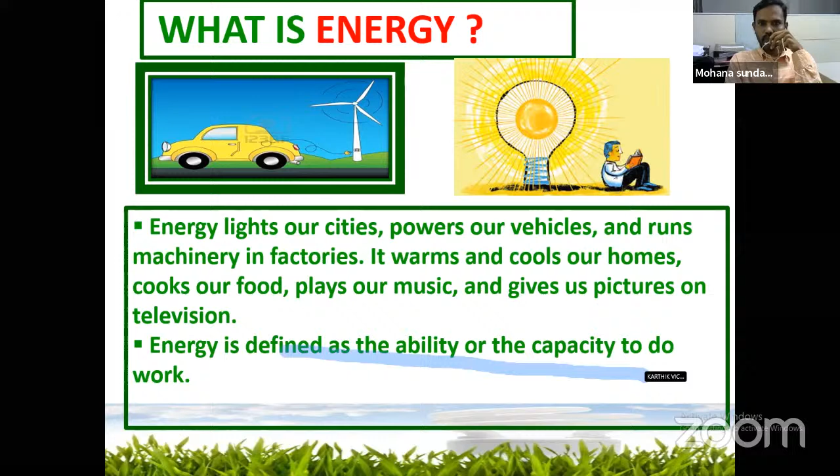It's very important in what way we are using and replacing energy, and how we are getting this energy. The place of energy is like an essential service in the modern world. We use it every day in almost all applications, starting with transportation, agriculture sectors, personal comfort, communications, and all kinds of entertainment, videos, and playing music. In almost all sectors, energy plays a vital role, and it's a very important commodity.

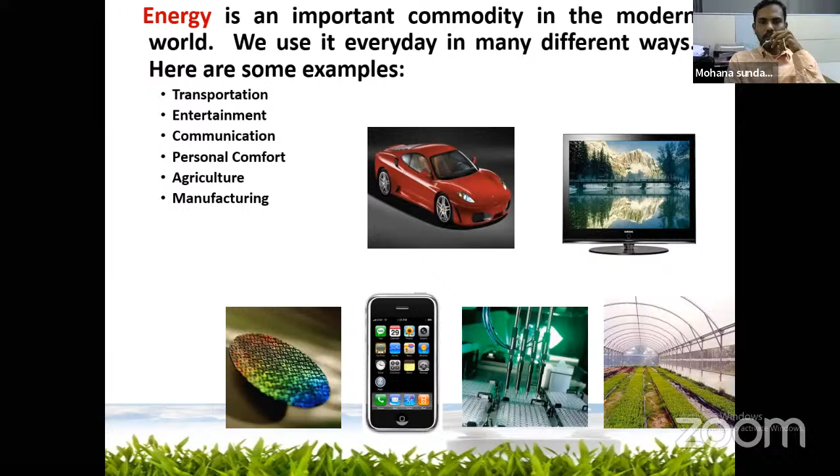So we have to take care of this energy. How we are generating this energy, and how we have to do conservation of this energy - these two parts are very important. These are the two verticals: getting the energy in different forms, which we'll discuss, and then how we are going to utilize this energy - how can we go for optimization, how will the conservation of this energy happen, so that it can be used for our better things.

As we know, energy can be classified into two types: renewable energy and non-renewable energy. As the past has shown, the use of coal and fossil fuels means we have to shift towards the paradigm of renewable energy, with usage of renewable energy systems and sources such as solar and wind, or maybe small kinds from biomass also. This kind of energy plays a vital role as per our UN Sustainable Development Goals - Goal number 7 is specifically for utilization of renewable energy. Renewable energy is available plenty, but how we are going to utilize it is a very important factor to consider instead of going for non-renewable energy sources.

As we know, we have thermal power stations burning all kinds of coal, and this may be critical to human life in almost all of eastern Europe, as well as in southern parts of China and in India. We are moving towards conversion of non-renewable energy to renewable energy, as we know it is hazardous to go for non-renewable energy sources, in the way we are extracting power.

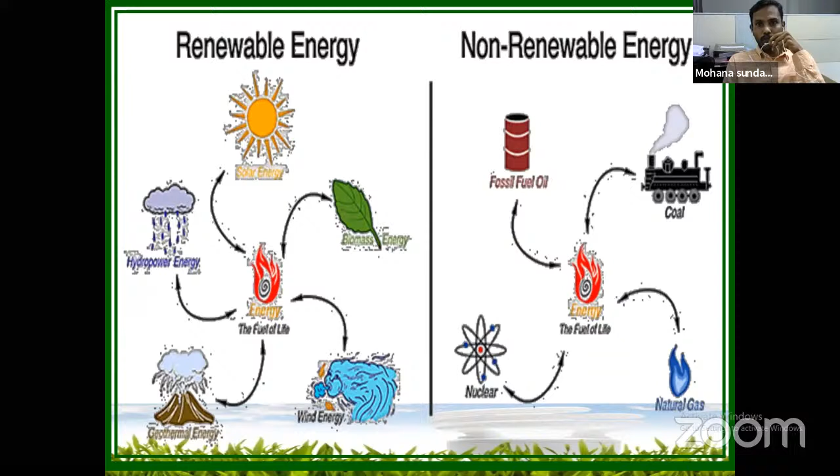So what are the alternate energy sources? We have different forms of these energies, like wind energy, solar energy, hydro energy, tidal energy, nuclear energy, and geothermal energy. Nowadays we are getting newer forms of energy too, like friction energy, and small thermal electrical energy from how waste can be converted. So in all kinds of forms we can get energy sources, how this waste heat can be used for conversion of energy.

Alternative energy sources nowadays play a very important factor in how they contribute to the world, utilizing almost all energy sources from wind, hydroelectric, solar, tidal, and a small part from geothermal. These are the alternative energy sources, along with biomass energy.

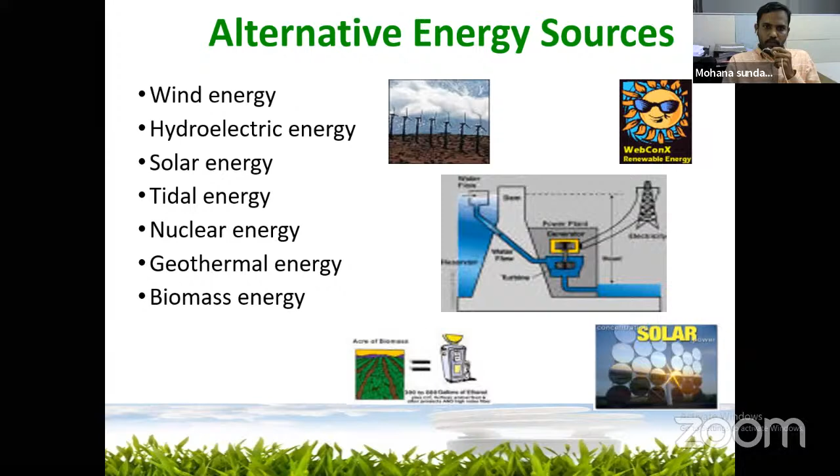As we speak about these energies, we have non-renewable and alternative sources. We have to go for alternative energy—meaning existing fossil fuel will not be considered an alternative. We have to move towards renewable energy, and how we implement this renewable energy is a very important factor.

In almost all applications, solar and wind play a vital role in the usage of renewables, particularly solar. The unit cost of this tariff has been getting reduced in the case of solar compared to three years back, which paves the way for the importance of utilizing renewable energy, particularly solar.

Solar energy comes naturally, so how we harness this renewable energy is very important. We may boost the voltages or power in such a way—being electrical engineers, we should go with different kinds of modeling of inverters and converters.

We can get more power that can be utilized for all kinds of applications. Our solar system might achieve only 30 to 40% efficiency, so as engineers, how we utilize it to get back to 100% efficiency is a very important factor to consider.

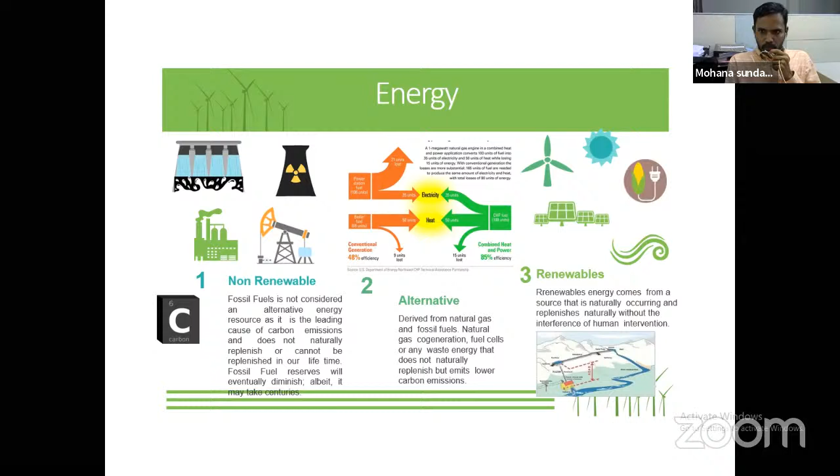That's why we are paving the way for conversion of non-renewable to renewable energy.

As we know, we have to conserve this energy. So conservation of energy—we are producing energy. The next thing that comes to mind is, yes.

Saving energy is a very important priority. That's why we are celebrating this entire week—how to save this energy. If we save this energy, we save it for the individual as well, and it contributes to the country. That's why demand keeps increasing, as the population keeps increasing.

It's important that someday non-renewable resources will be completely exhausted, and we have to particularly move to alternate energy like solar or wind energy. So how we utilize these renewable resources, and how we optimize our dependence on them, like solar or wind energy, is a very important factor.

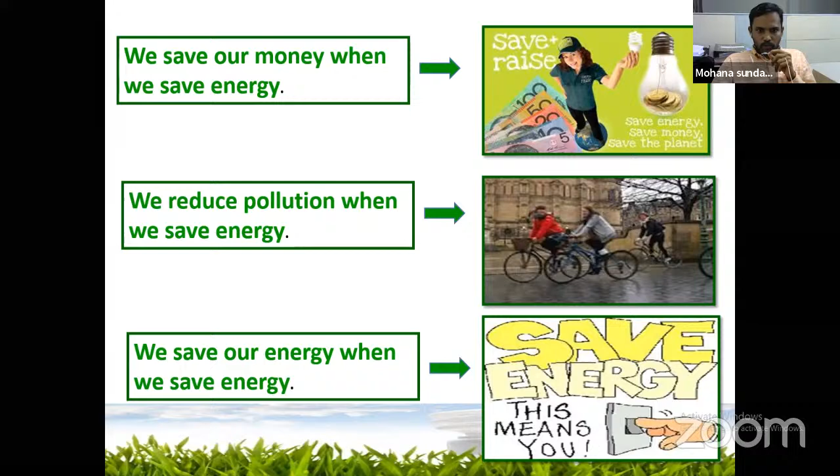Being human beings, we have to live for many years and give to the next generation. We need to reduce pollution for the next generation—that is very important, so a sustainable lifestyle is very, very important. We save energy—that's the principle behind it.

The utilization and replacement with energy-efficient devices is very important. Star rating plays a vital role in home appliances, so we should go for high star rating devices. That is a very important factor to consider as an engineer.

At home we know that we cannot keep lights unnecessary, so that's the thing we can do to reduce energy. Based on that, we'll have small kinds of energy conservation we can implement, and then we can utilize water heating efficiency. We can go for different kinds of IoT devices.

Now they keep on incorporating everything. We can reduce the speed of that particular fan, or we can go for different kinds of energy efficient fans, like the BLDC fan, super fans, energy conservation fans. Also in public places, we can switch off the fans and lights in bus terminals, or switch off the street lights whenever required.

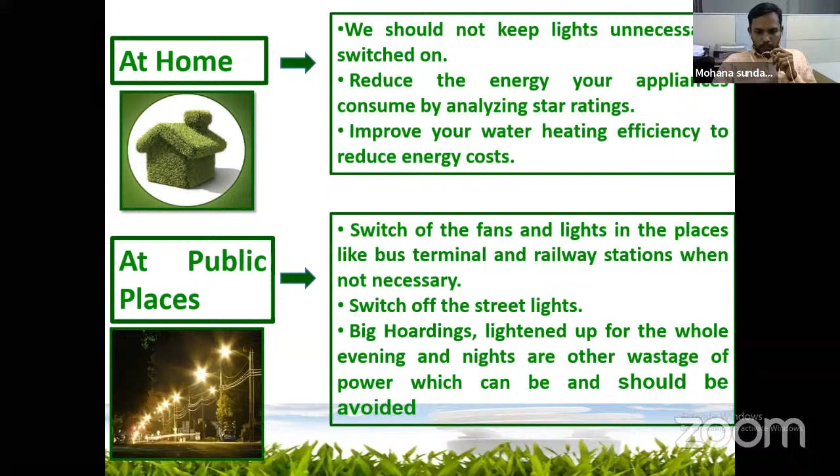So this kind of innovation and technology we can bring back, as we have so much of an audience who may be technically sound. We can think about how we can optimize these kinds of things so that we can save energy in our public places. That plays a vital role.

So for energy conservation, as our chairman and past chairman pointed out, 70% of India's energy comes from fossil fuels, with coal accounting for 40%. So in a country like India, by the year 2030, the depletion of these fossil fuels will be happening.

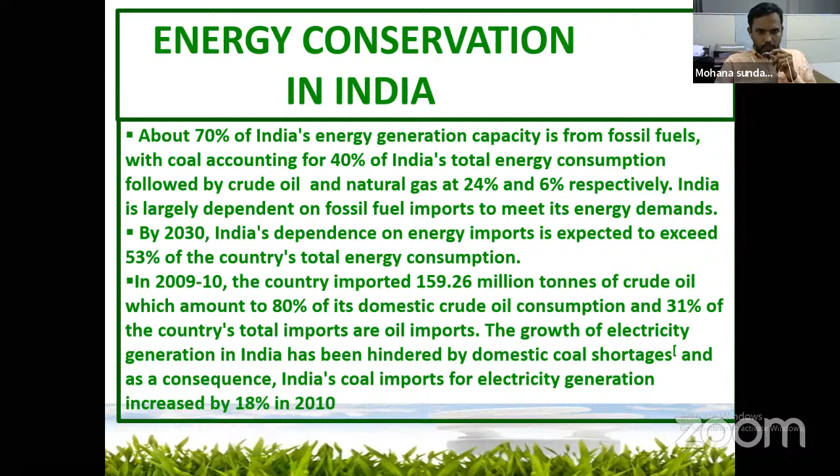Then we have to come back to different kinds of energy sources, like renewable energy. So these may be some basic statistics on why we are using energy conservation in India. As we pointed out, what is the basic difference between conventional and renewable energy sources?

So here the hot topic is energy management with respect to the renewable power system, and how we are effectively using it when connected to the grid-tied power system. We know that on the conventional energy sources side, we have fossil fuels and nuclear fuels, which create atmospheric pollution.

It's not clean energy, compared with renewable energy sources. Renewable energy sources provide a clean energy system with zero pollution.

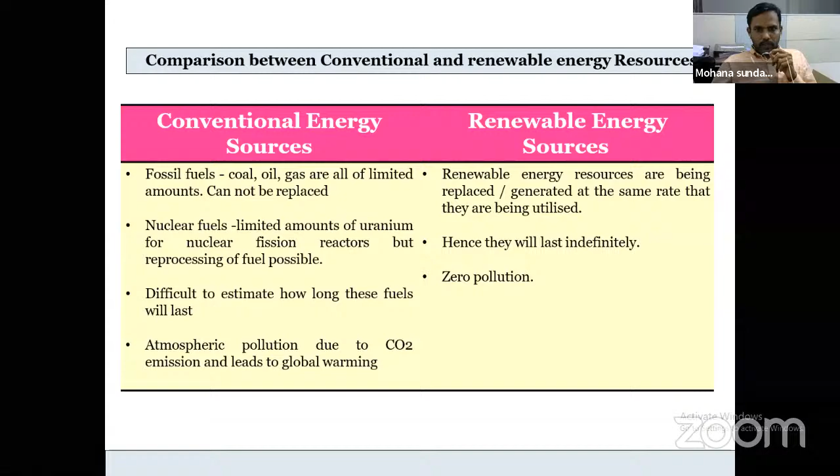As we know, the end of coal is coming 3 times faster than expected. What is the report in the 2022 Integrated System Plan on energy policies? In Australia, they are planning to shut down all kinds of coal generating power plants. As new policies come, even some industries and governments will be surprised.

So that's why we can work towards reaching the UN Sustainable Development Goals, and pave the way for other generations. The end of coal is increasing very fast, so we can expect that almost all will go with renewable energy sources.

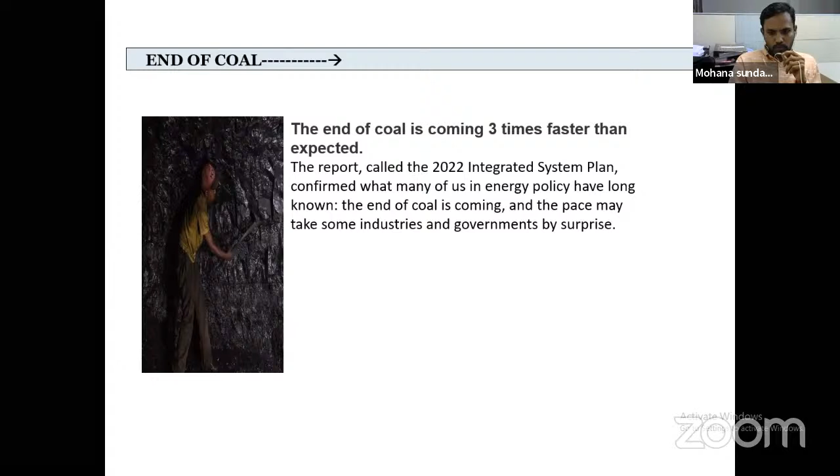We are standing in the fifth position in renewable energy scenario, with respect to the entire world. In fourth position as well, starting with respect to 2018 and 2019.

We are almost nearing this target, with 156 gigawatts reached. Almost 6 gigawatts from nuclear, and almost 150 gigawatts from renewable energy sources, as we are planning for 100 gigawatts from solar, 60 gigawatts from wind, 10 gigawatts from biopower, and 5 gigawatts from small hydropower plants.

We are also doing small conversions of rivers, converting those into useful utilization of energy - that's the 5 gigawatts from small hydropower plants. This is the target; we are on par, reaching this target of maybe 100 gigawatts.

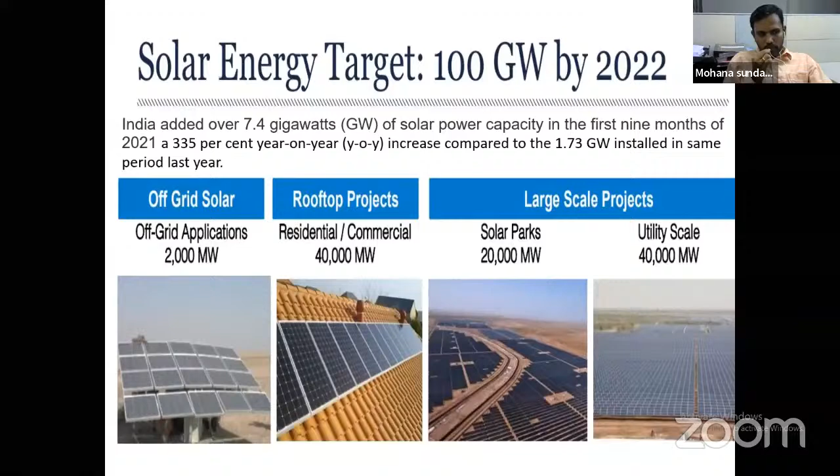Recently we could see this kind of erection of solar power plants also in our CRD. Already they are planning to erect all kinds of small projects. So these are some of the ways we are replacing our solar panels, different ways, with innovation technologies.

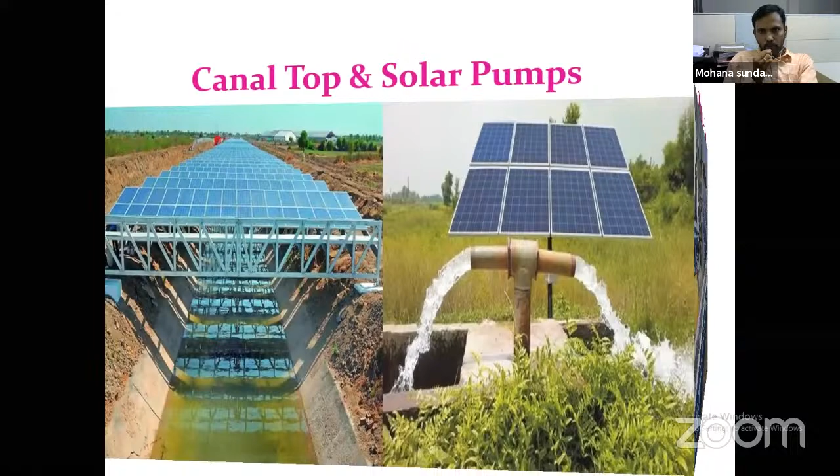How you can replace it, maybe like floating solar plants, or over the canal, and then for agricultural purposes, how we can use solar energy. That is very important, so maybe we can use it for railways. As we know, modernization of both advanced and developing countries' energy needs is a very important factor, so the way we are taking this energy is very important.

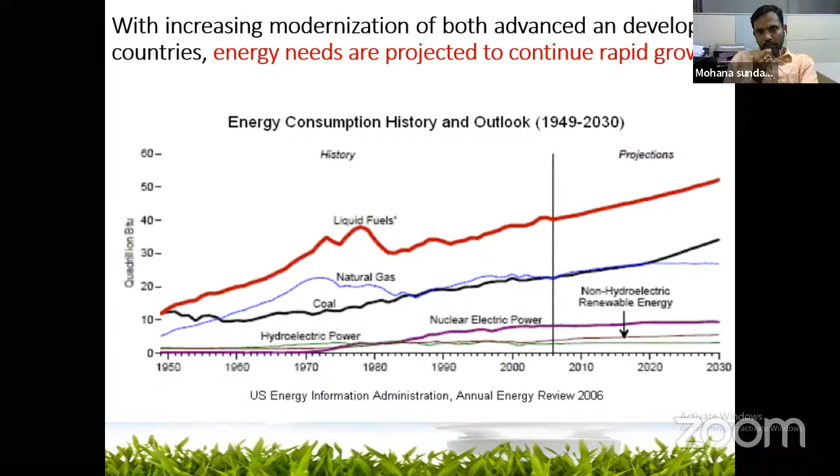This slide shows our projection towards 2030. There is rapid growth, a tremendous increase in replacement by renewable energy, almost 40% of whatever we are having right now. We are replacing fuel from renewable energy sources.

As we know, today's technology components, like engineers, we have good kinds of engineers who can develop new energy systems. You can see a new small startup company, how they are generating energy from friction. Everything, they are able to do it.

I will show you a video of how the technology is booming, how they are taking energy from small kinds of innovations they are doing. That's very important, since we will have so much audience watching this, to see how various innovative methods can be utilized.

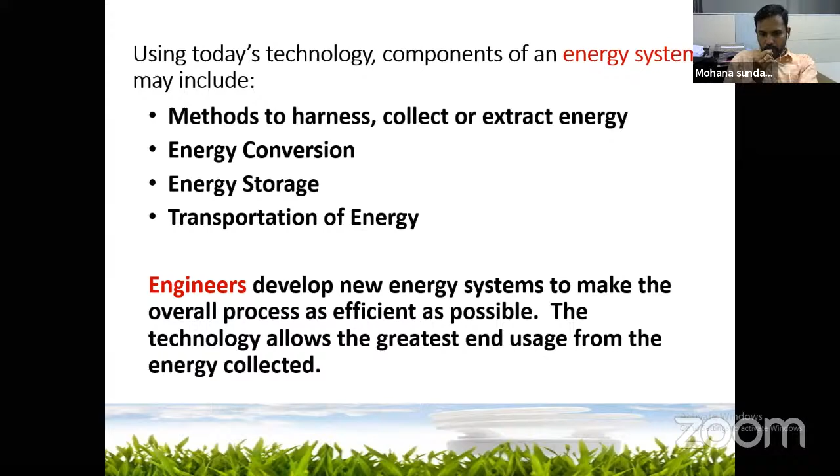In the sense of how there can be energy storage, how there can be conversion, how this can be transported, these things are very innovative. It plays a vital role with respect to engineers developing new systems.

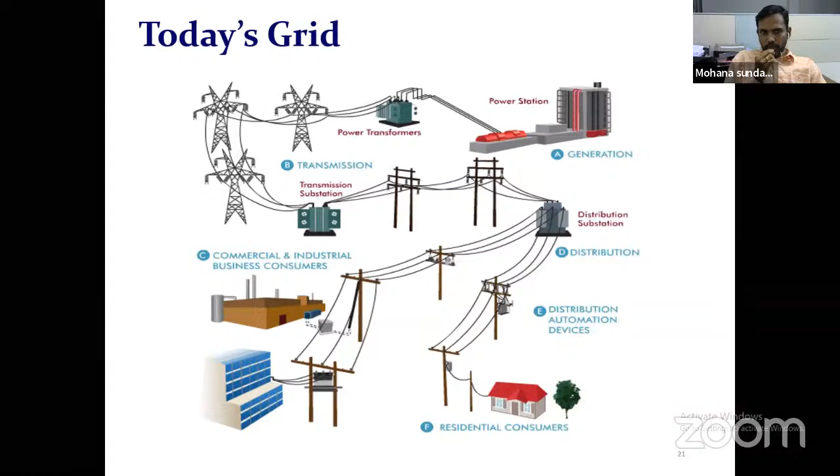This may be like our today's grid, with all this combination of wire systems. Everything will have the traditional power generation system, maybe the grid, how they are. This may be the common things like generation, transmission, as well as distribution.

We can replace all kinds of systems with renewable systems. When you're integrating this, maybe tying up with the central power system, then we'll be facing so much of the problem of imbalance in everything. So being a technical engineer, how should we handle these kinds of imbalances? That is a very important factor to be considered.

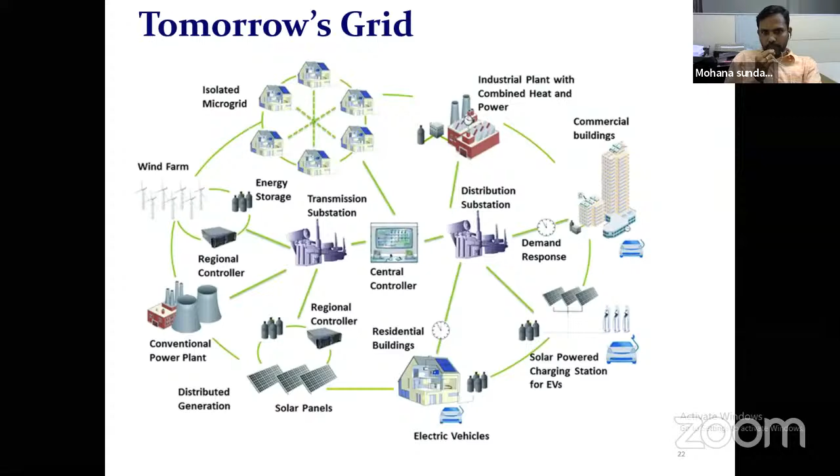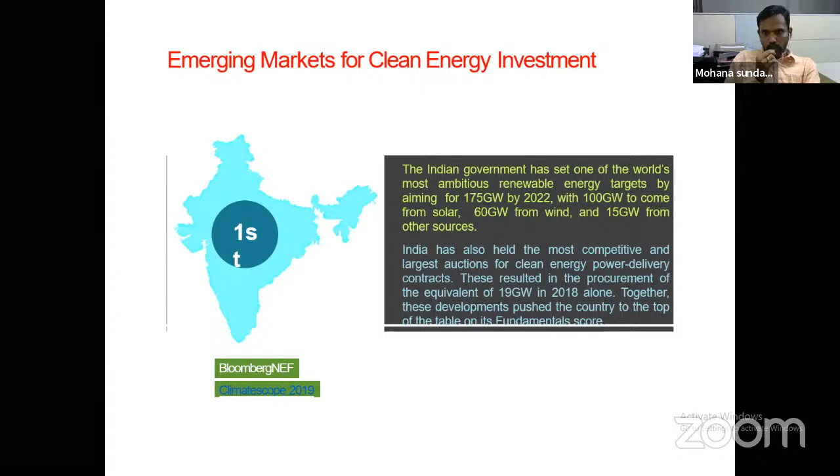So this is like emerging markets. As already mentioned, we can see that we are reaching almost 175 gigawatts, maybe in a couple of years, in 2022, we will achieve this goal with major contribution from renewable energy sources.

As people are moving towards application of this, particularly solar energy, there will be a huge job vacancy, a huge need for jobs, particularly in the world. We could see that almost 24 million jobs will be needed by 2030, as we are promised to the UN Sustainable Development Goals.

We can utilize this, and there will be a tremendous increase in application of renewable energy, particularly solar energy and wind power. So this space has huge opportunities for engineers.

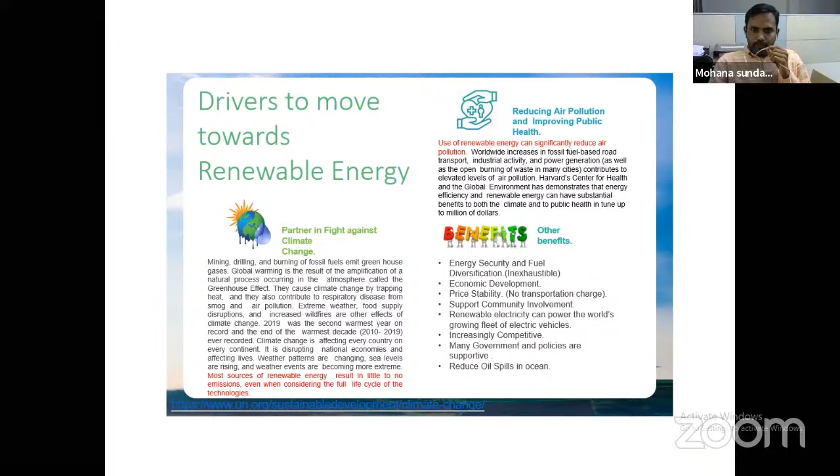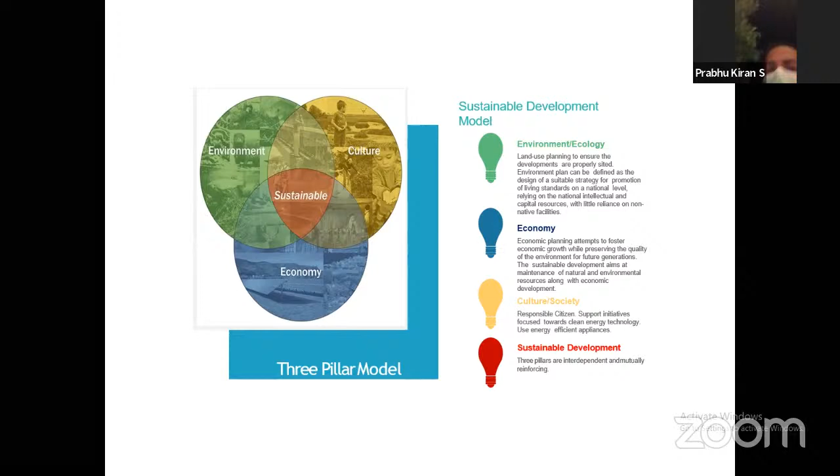For sustainable development, we use the three-pillar model: environmental, cultural, and economic, with techno-economic analysis and how it can be placed for the society. This is a very important factor to be considered.

Solar is already becoming cheaper than new and existing coal. The cost of utilizing solar power, the per-unit cost, will keep getting reduced, and we expect further reduction. So automatically people will keep moving to standalone or grid-connected systems. This paves the way for how people are moving towards renewable energy, particularly solar and wind.

When talking about this model, all kinds of modeling factors are very important to consider. This includes PV modeling, how to effectively utilize power from solar energy, and how that power is taken and placed back to the grid.

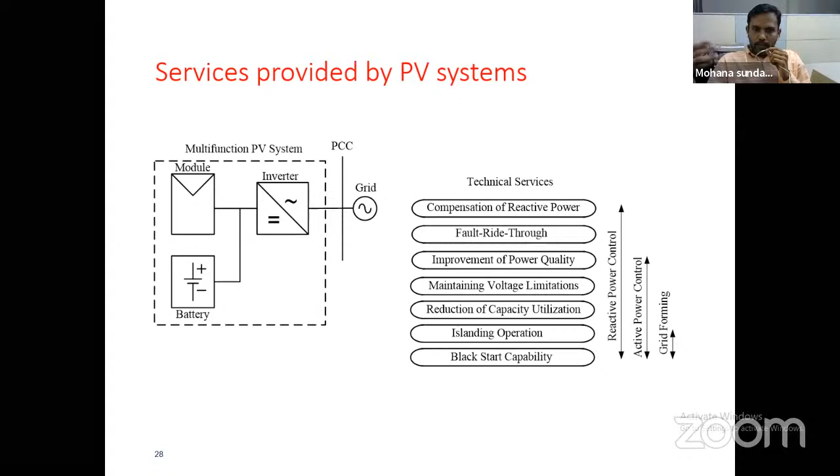We completed small case studies along with my research scholars, where we worked on how to maximize the efficiency of the PV grid systems.

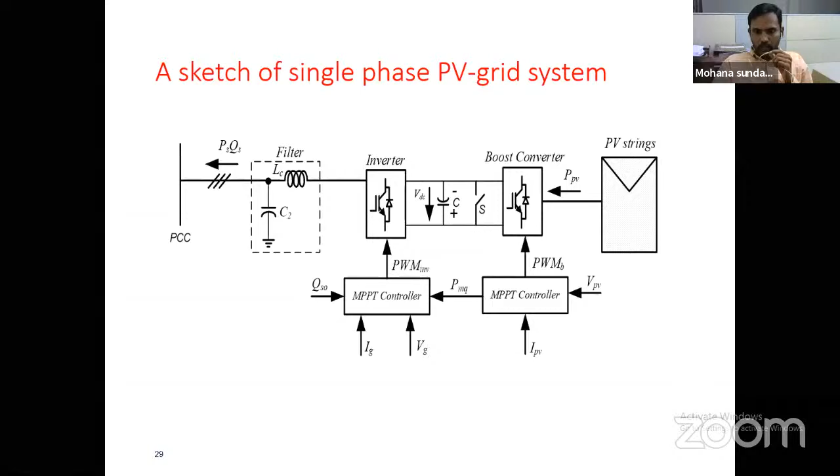We use new innovative ANN-based techniques to optimize things so that the controller gain keeps increasing, allowing it to provide a continuous power supply. That is the main factor to be considered.

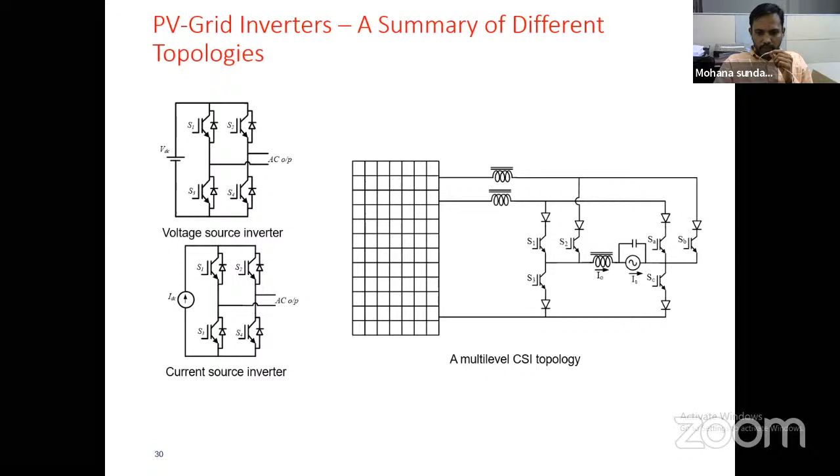These are some different topologies for PV grid inverters, like voltage source inverters and current source inverters, and how we handle multi-level CSI. We'll see later how these can be connected in different forms.

As a basic fundamental, this is the classification of multi-level inverters: single DC source and separate DC source, with diode clamp and capacitor belonging under single DC source.

We'll see later, in different case studies, how we implemented this, what the objectives were, and what we achieved.

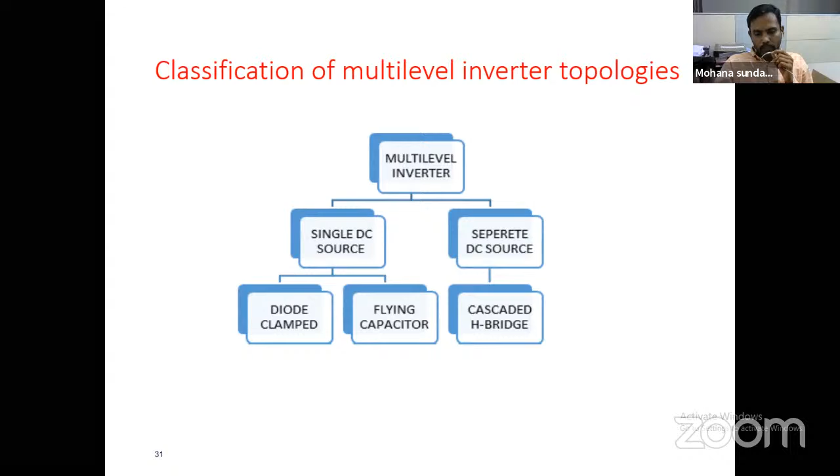The traditional two-level inverter versus multi-level inverters: before going into multi-level inverters, there should be a comparison. As a researcher or in any startup implementing a multi-level inverter, the first question is why we need a multi-level inverter, why it runs on two levels, and why we have to change to multi-level. What are the prerequisites or constraints, and what is the advantage?

Looking at various factors we will consider, the switching loss is high in two-level inverters compared to multi-level inverters, where it will be low. The dV by dt is also high in the case of two-level inverters. These are the parameters.

On the left hand side we have more voltage stress. So when going for this kind of multi-level inverter, the stress will be less, the frequency also very less, and the level of output voltage is very high, as it's a multi-level inverter. The third important factor is the harmonics, which we have to reduce. That's also better when compared to a two-level inverter. So this is the basic thing.

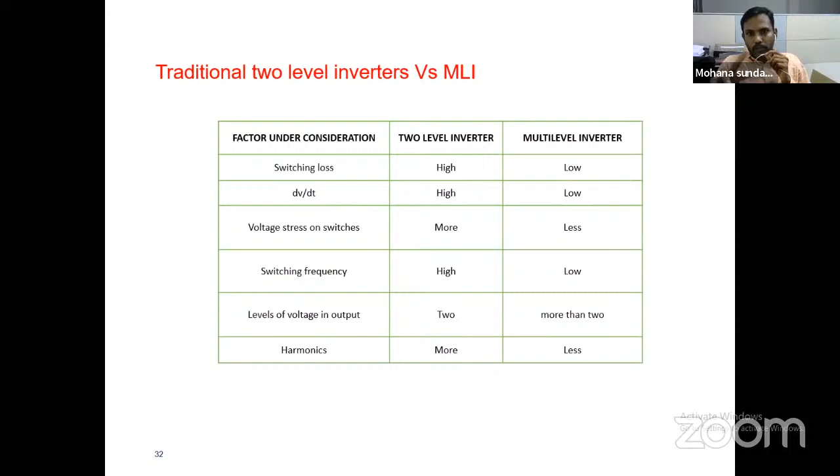When going for multi-level inverters, as pointed out, there are different network structures: diode clamp, flying capacitors, and cascade multi-level. So what is the advantage, or disadvantage? These things play a vital role with respect to efficiency. We can get high efficiency, but there are certain disadvantages also.

The real power flow control for the inverter is very difficult. These kinds of things play a vital role. Being an engineer, we should know why we go for different kinds of inverter topology, particularly with respect to this MLI. So this will be your cascade multi-level.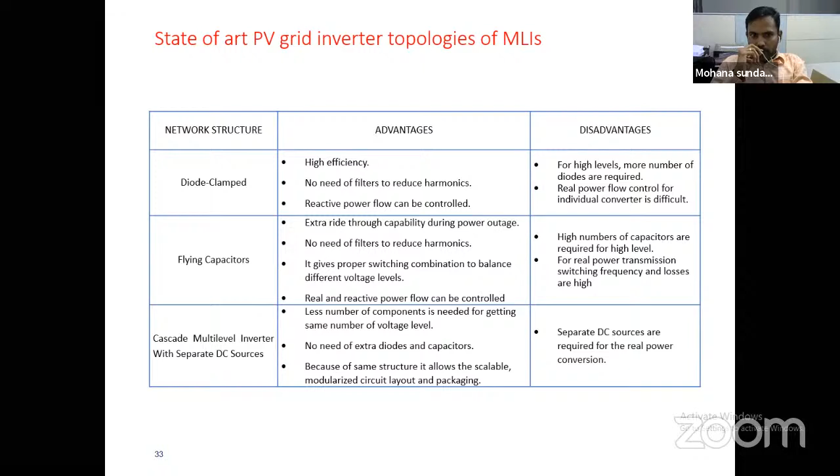So after the basics, why should we go for this Z source inverter, particularly in applications in solar? We know that Z is a combination of inductors and capacitors.

It can be operated as a voltage source inverter or as a current source inverter (CSI), depending upon the application and the load. The output voltage varies from 0 to infinity. These solar modules are widely preferred for residential as well as commercial use.

So the main concept behind this is nothing but we have to develop an economical and efficient PV system. That is very important.

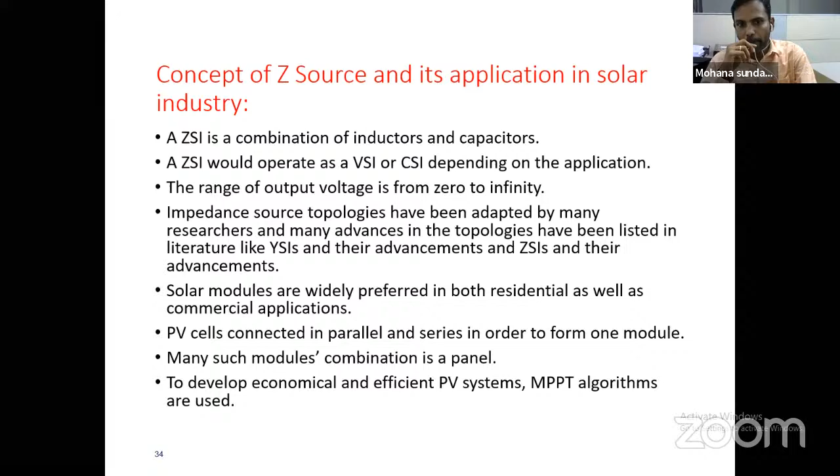As pointed out, this PV inverter structure, the inverter portion plays a vital role, like the boost circuit, in order to convert DC to AC. Z source is an intelligent choice. People are doing all kinds of research on how we can utilize this Z source inverter, particularly because it can boost the voltage level with a very compact structure.

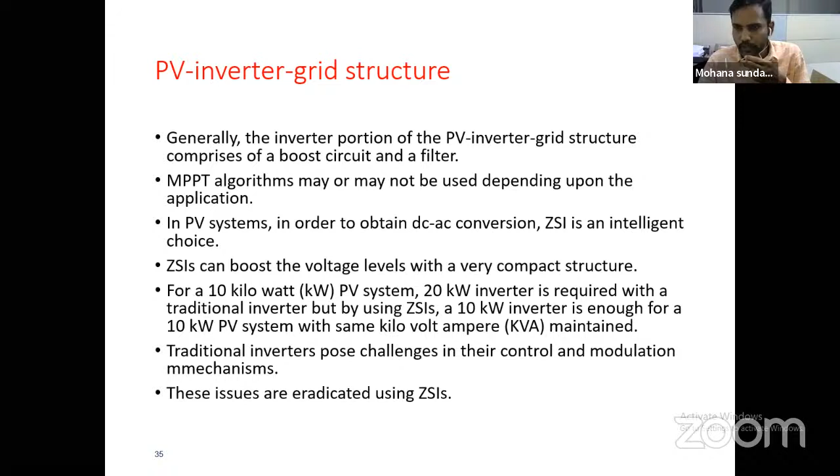That is the main advantage compared to ordinary inverters. For example, for a 10 kilowatt PV system, a 20 kilowatt inverter is required with traditional inverters. Whereas when using ZSI, a 10 kilowatt inverter can work with a 10 kilowatt PV system. So the same kilo volt ampere rating is maintained, and we should not go for an extra 20 kilowatt inverter. Traditional inverters pose some challenges in their control or modulation mechanisms, and these can be eliminated by using Z source inverters.

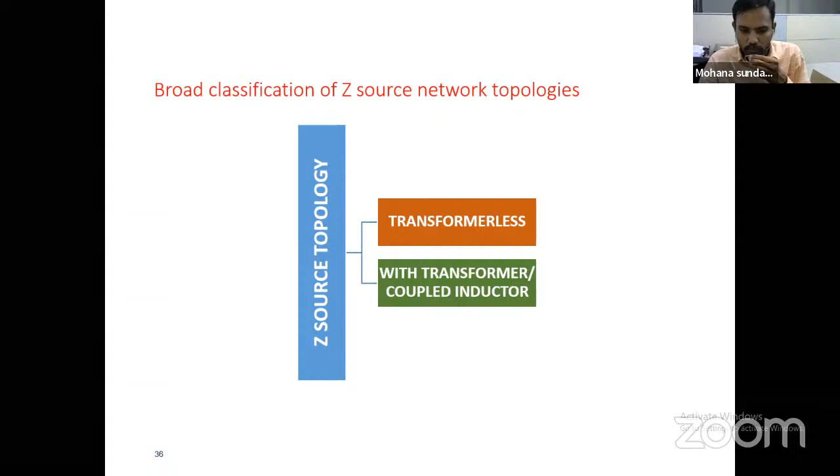The topology will have different kinds, transformerless and transformer-coupled inverters, so it's these two things. Again, why we are going for Z source - even within Z source we will have different configurations, different topologies.

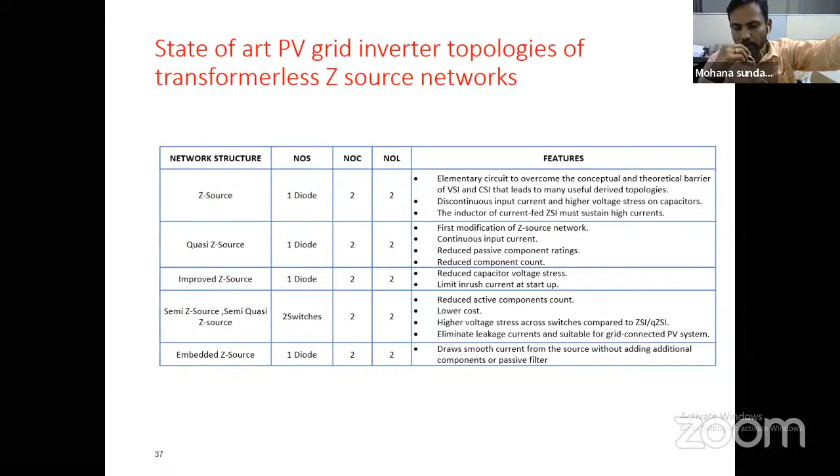So this will be a continuation, different kinds of network structures again. We'll have different combinations of this, different applications, different features.

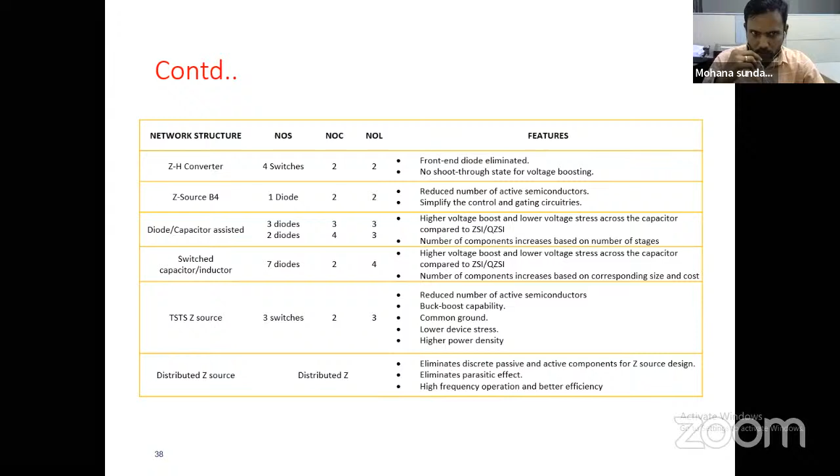We can reduce the number of active semiconductors. We can improve the buck boost capability also, and the high power density also depends upon the application, going for different applications, maybe like electric vehicle applications also.

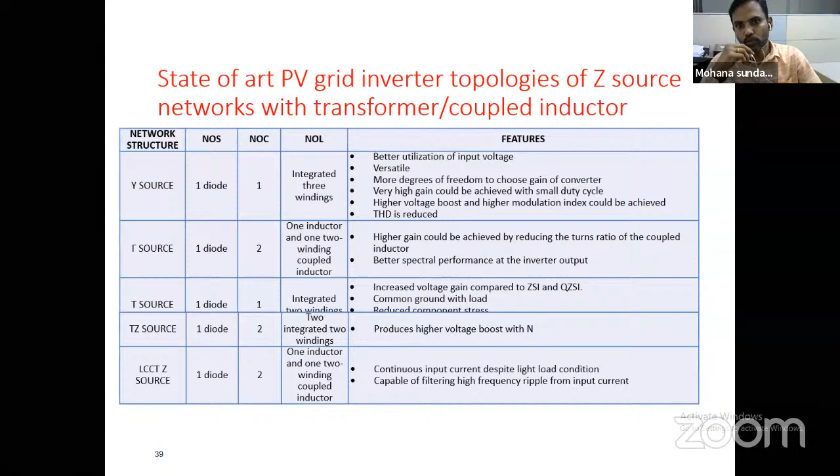So this slide shows different combinations. Why am I showing these slides? Being a technical engineer, you should know why, what is the importance, why we need a Z source compared to different kinds of sources, and how it can be utilized properly, how we can boost the gain, higher gain, based on your duty ratio. That is very important, so this is in continuity of this thing.

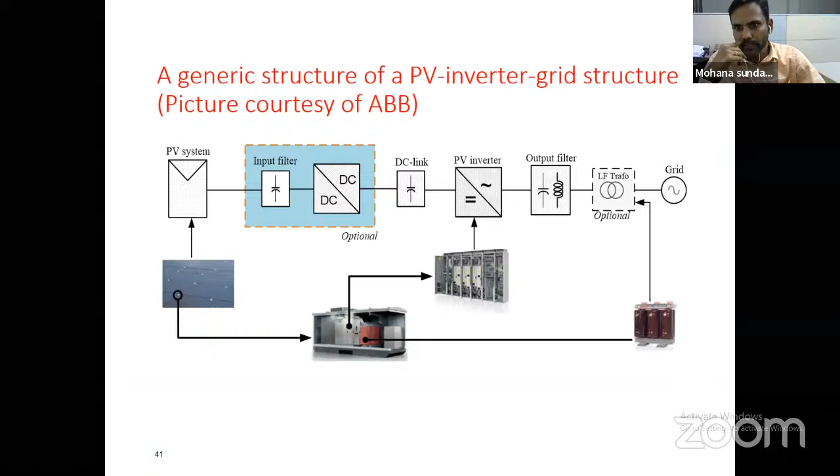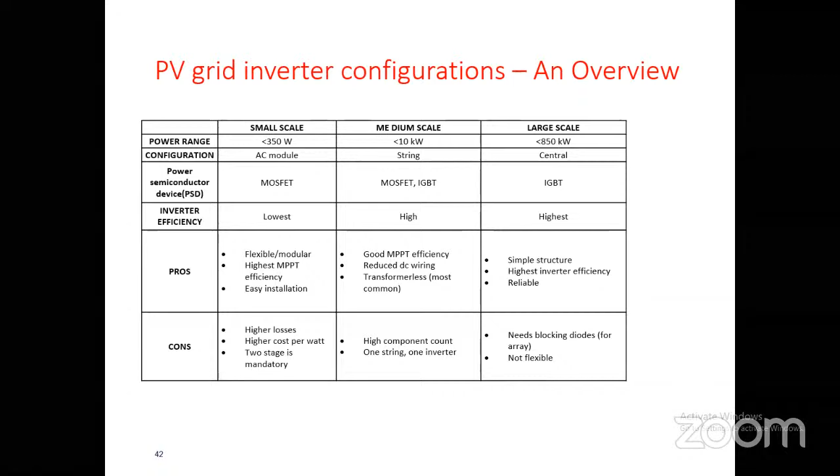This picture, courtesy of ABB, shows the entire system, how we are replacing it for different applications like grid applications, taking the power from renewable energy sources, how we are connecting to the grid. This may be for small scale applications, maybe less than 350 watts, or medium scale less than 10 kilowatts. For this center, we'll have different configurations like MOSFET and MOSFET-IGBT and then IGBT, with all the pros and cons, like how we are achieving flexible mode or grid efficiency. That is very important when coming to different applications.

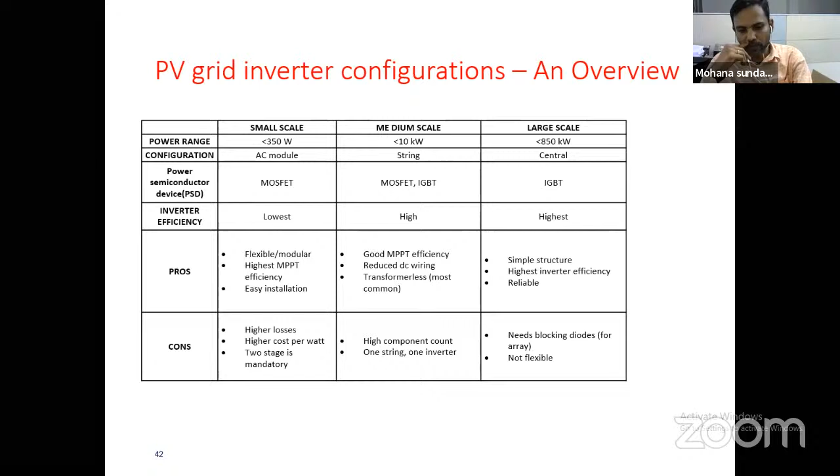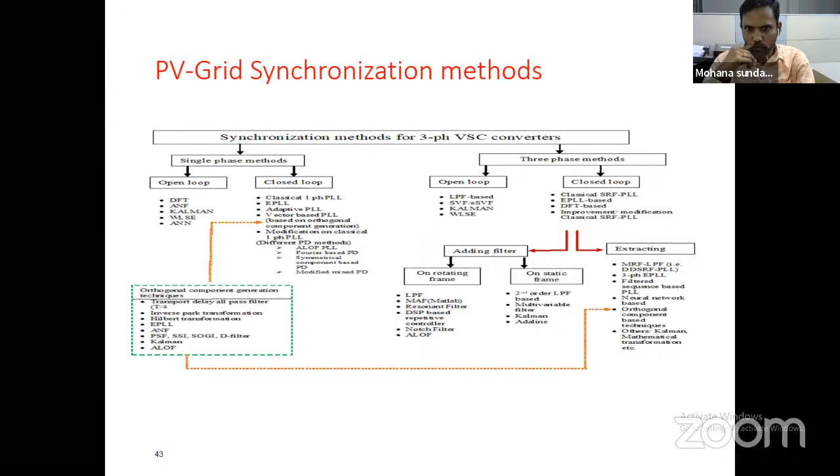So why we are having this configuration, we have done a kind of survey, and we can come up with solutions, going with new kinds of configurations, like switch resistance source configurations. This slide shows how we are synchronizing the methods with respect to single phase and three phase, maybe with open loop and closed loop. This is the basic fundamental thing on how we are adding this.

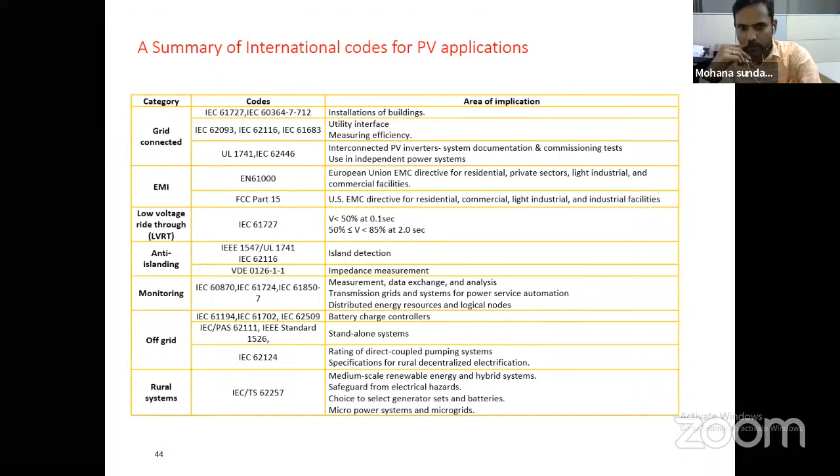These are some specifications with respect to international codes, how we are placing this for grid connection, with respect to different categories like off-grid and rural systems, particularly for LVRT and anti-islanding. These codes are specific international codes, and the area of application where it can be placed for a better system, maybe for the standalone system, off-grid system, rural system, medium scale systems, particularly with renewable systems and hybrid systems.

When we are taking the optimization effect, that is a very important factor to be considered for treatment of uncertainty. Nowadays people are moving towards the digital area, replacing all kinds of AI techniques to get the variables, like taking the mathematical modeling. PV modeling is a very important factor when they are buying a PV model, because whatever data sheet they provide is nothing but for standard temperature operating conditions. Here the temperature keeps changing, and the irradiation keeps changing, so we should have awareness of how we can model the system with respect to the entire system, with respect to MATLAB, how we are going to do it. These things are very important.

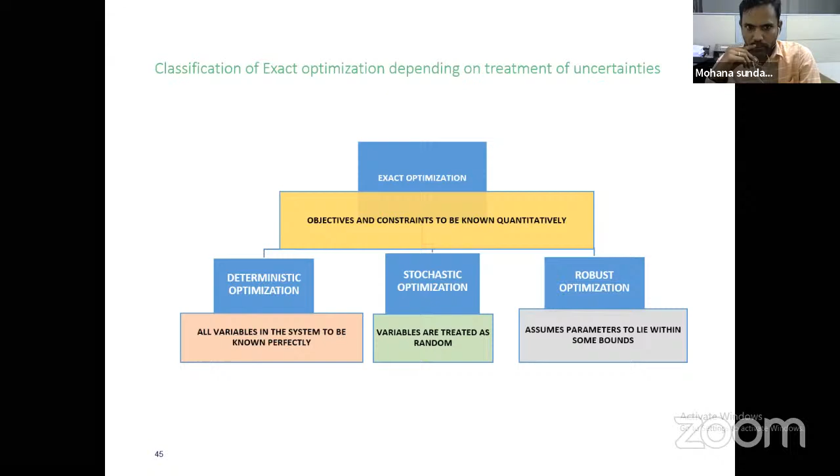This optimization plays a vital role, which provides how we are using this optimization constraint with respect to the parameters to be considered. We can go ahead with minimizing the losses and different kinds of optimization tools, control variables, and the distribution system. These are some basic things we have done, like a literature survey, so why we need an optimization technique to solve our particular problem.

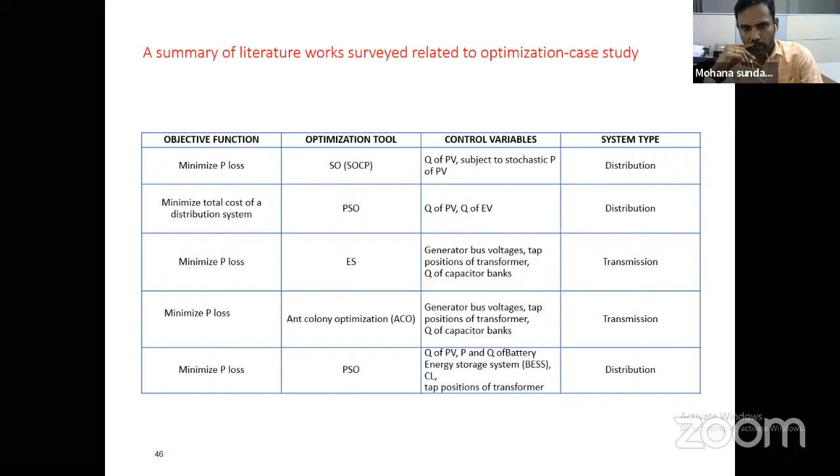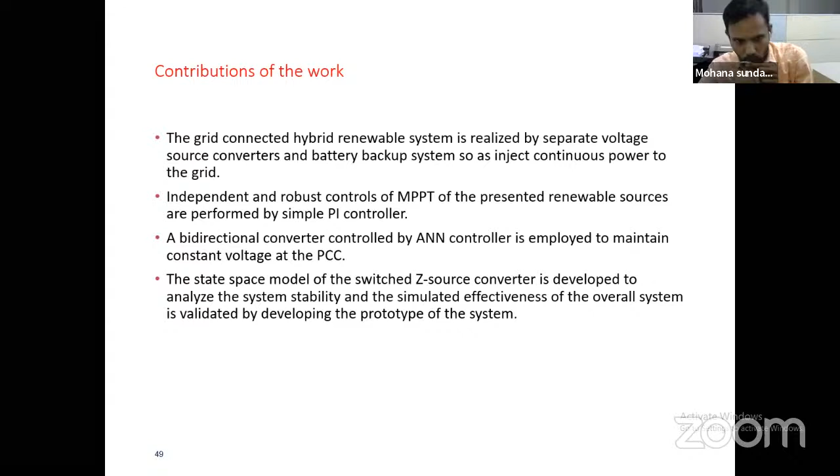That is our ultimate aim. So here we are converting, we are replaced, as we already told that, with a Z-source converter. But here we are making a small modification - this switched Z-source converter is developed to analyze system stability and then the effectiveness of the overall system. So we have developed all the mathematical modeling, and then applied this Z-source converter.

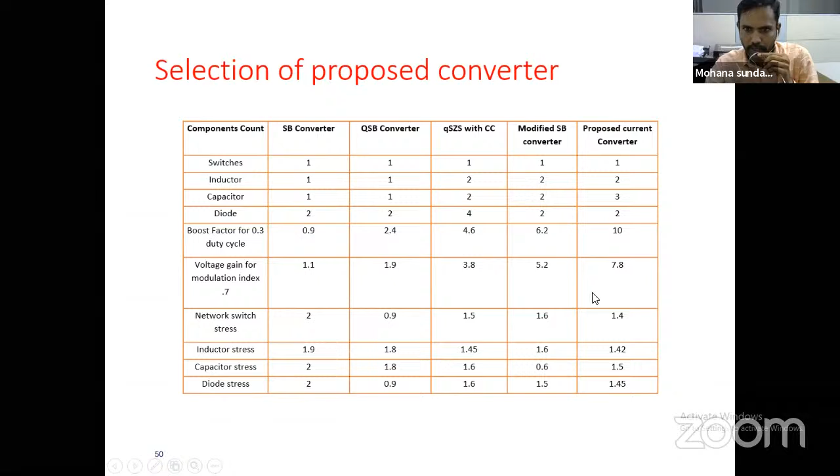The last column shows our proposed current converter, how we are using the switches - one switch and 2 inductors, and then the key component is we are using 3 capacitors, and the boost factor. You can see that for a 0.3 duty cycle, the gain of this output power, the boost factor is almost 10, which plays a vital role, and also the voltage gain we can achieve is 7.8.

So this proposed converter allows us to utilize this energy to a maximum, so that we can give back power to the application. That is a very important factor to be considered. Being a researcher or an academician, we are working on how to improve this system - how we are getting the energy, how we are converting it, how we are boosting it.

That is a very important factor - how people are working on boosting their output voltage. That is very important to be considered. So here we should see the entire column. We have enough confidence and proof that this proposed converter will provide excellent performance compared with existing systems or converters.

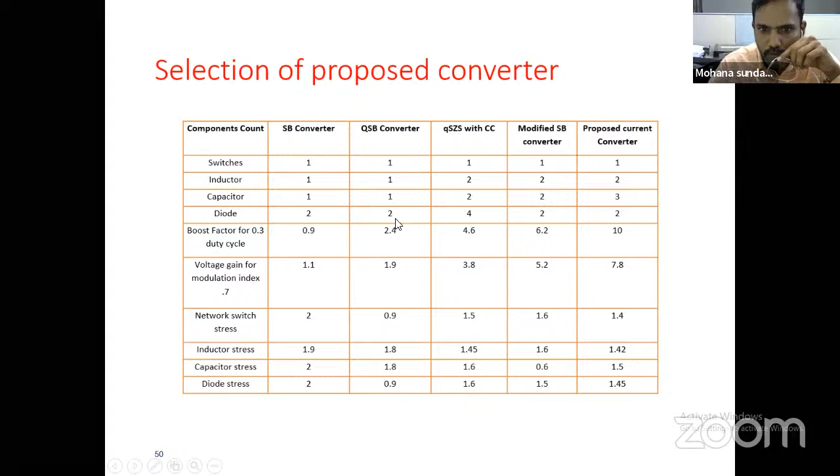So we have completed the entire system - this is our new kind of boost converter. We have done 3 systems: the PV system and the wind energy system, along with battery management. How we effectively manage energy with respect to gain and base control, and then we are feeding the output to the grid. That is a very important factor to be considered.

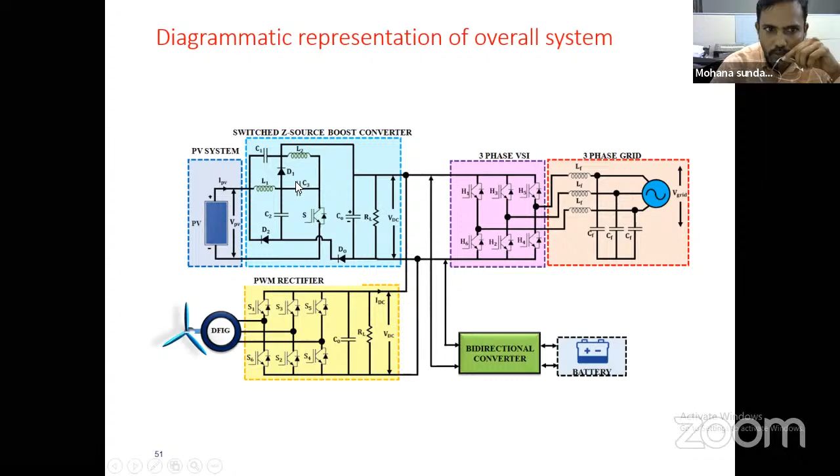So here we can see we are applying these 3 capacitors and 2 inductors, and improving the boost and gain factor. Even for the duty cycle T-on divided by T-on plus T-off, even for small time, we can still get an efficient output. That is a very important factor.

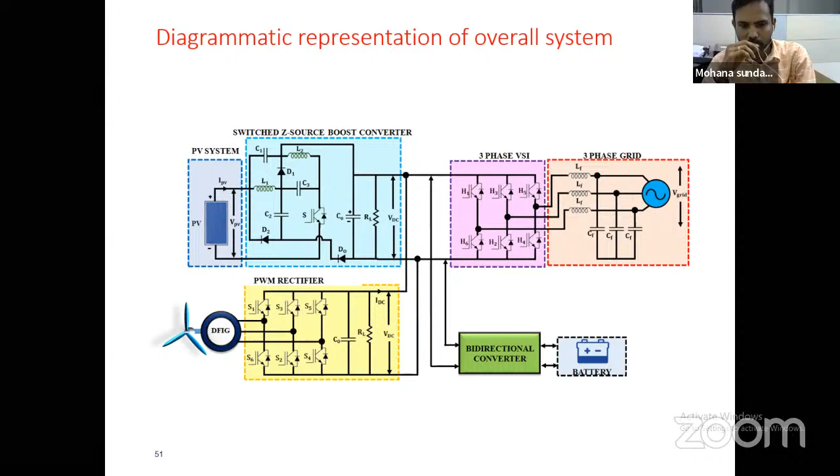That is - we have done the simulation results. We have also done a small experiment as well. So this is the switched Z-source converter. Yes, based on this, we can achieve our output.

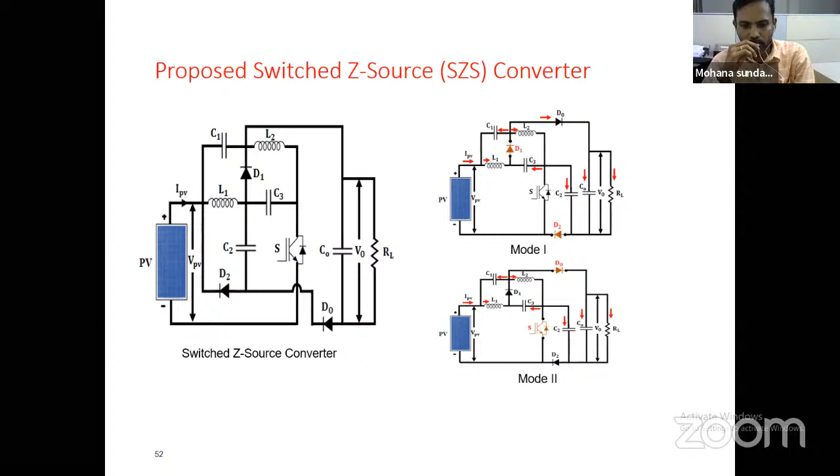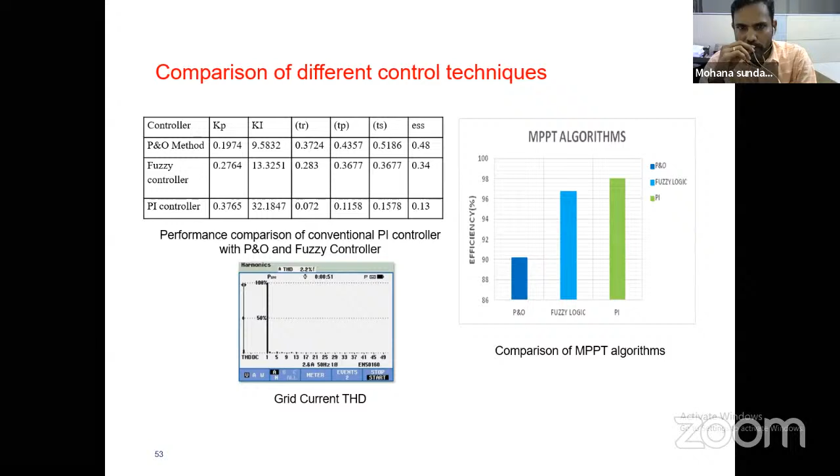So we have made a comparison - how with the use of the PI controller and the fuzzy controller, we can compare different values of output. So we made this comparison as output to justify how these intelligent techniques can be utilized for control of these things. So what are the inferences from the case studies?

We could see that the flow of power is very continuous - a dynamic using the Z-source converter with the grid. It can maximum be used with the 3-phase inverter we designed. So this is the kind of work we have done, and this continuous power flow is a very important factor.

So how we are balancing this energy, as the topic is energy management between the inverter and the battery, is very important - the grid is very important, the source and grid are very important. So we are going to utilize the battery energy storage system.

Most importantly, incorporating these kinds of converters, the THD level plays a vital role - almost the THD level will be below the IEEE standard levels. This proves the system can be a very important converter to be utilized for our modern power systems. The proposed SVPWM can be utilized to give enough DC voltage with proper duty cycle control, thereby controlling the harmonics.

As we are speaking about this, I feel how we have utilized energy efficiently. This is like a case study. We have done the case studies, and based on them we can see that how we utilize this power is very important. So energy management is very important.

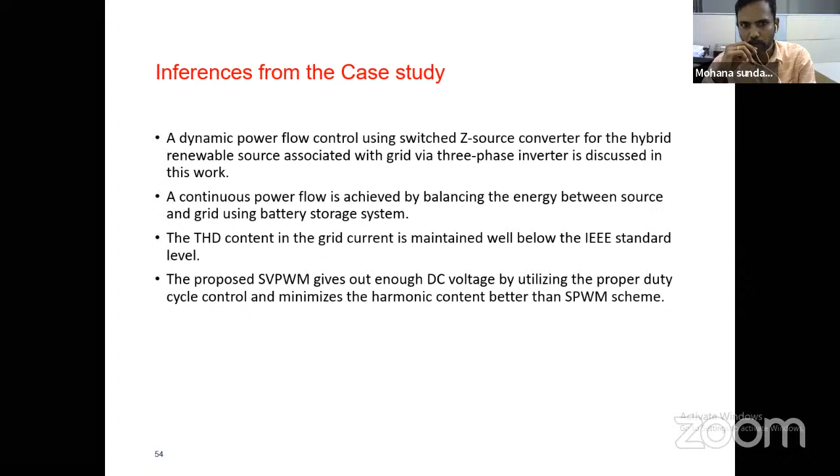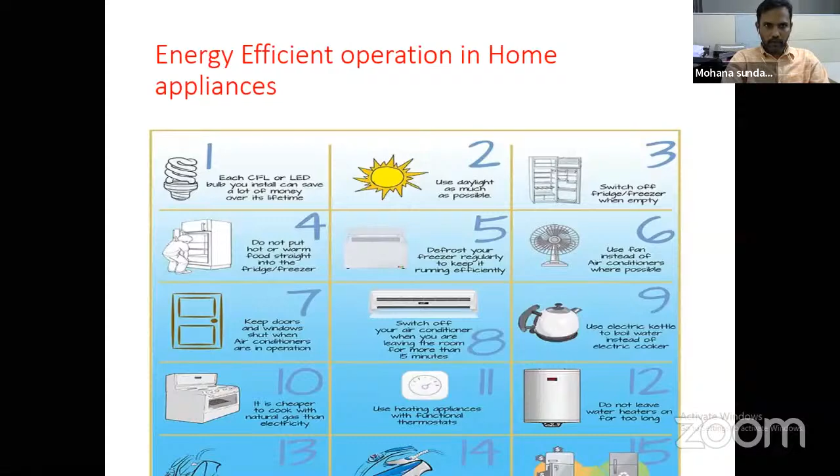In the next slide, I will show one more video that can be useful - how this small kind of energy conservation is generated by a small startup company, with respect to the energy wall. It's very interesting.